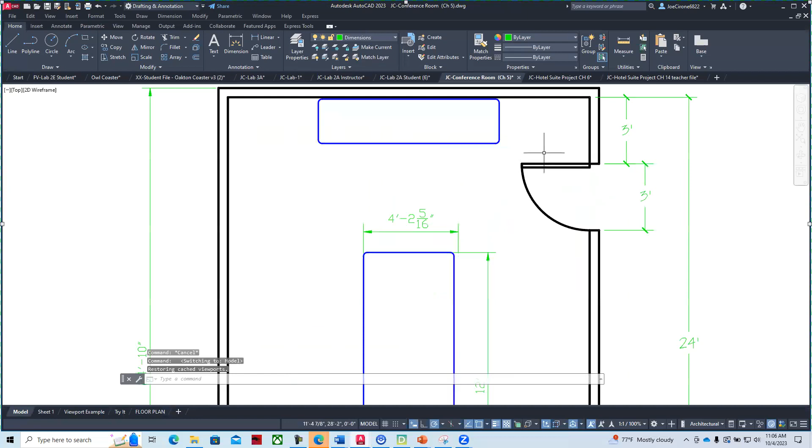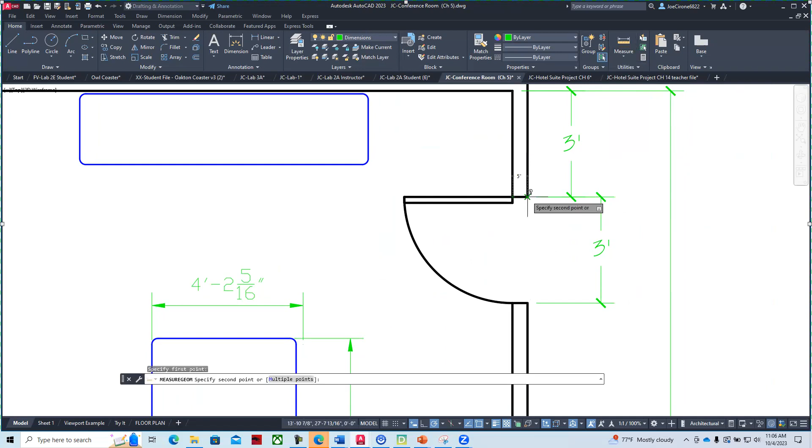So if we look at our CAD drawing, here's our conference room, and then we can analyze it. We can look at things like, is the door really 3 feet? We can go in and measure a distance using Object Snap or our endpoints, and we can see that it says 3 feet. We can measure things like how thick the wall is. Again, we can go and click, and we get that information.

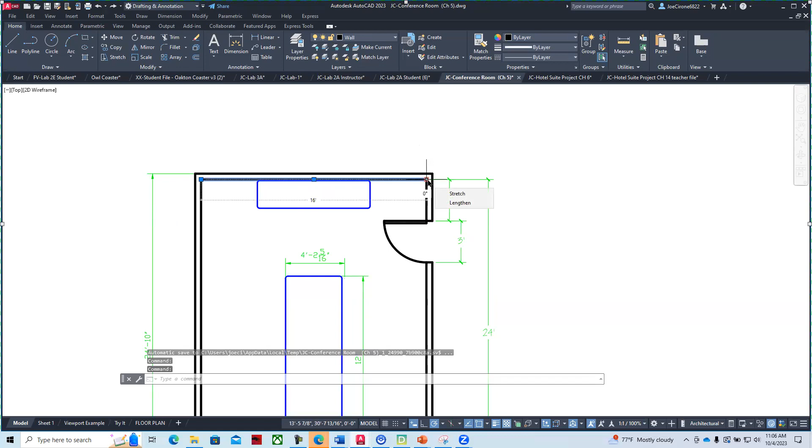You can also use grips. So if we click on a line and click on a grip, we can see that that is 16 feet, 0 inches. And then we can also calculate out room sizes.

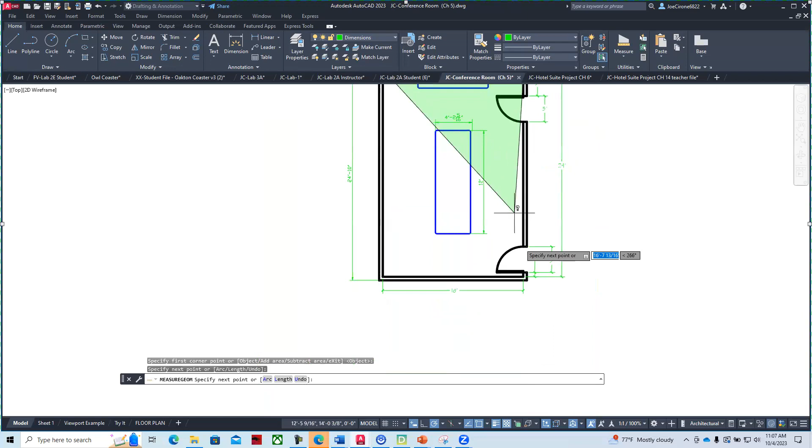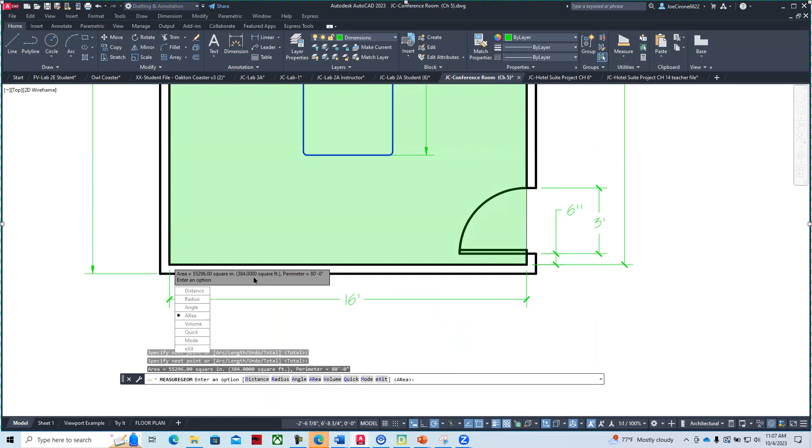So we can go to our utilities, and let's say we wanted to put hardwood floors in. We could go and measure the area. You want to use OSNAPs, but what's nice about using CAD is that it will figure things out even if the room isn't square. Square rooms we can usually calculate pretty easily, but if we work with shapes like rounded or other complicated areas, the CAD system will figure that out for us. This room has 384 square feet and a perimeter of 80 feet.

For example, let's say I had a round room, and I'll just make a big circle. Let's say this is going to be a 20-foot diameter room. Well, what is the area if I wanted to put hardwood floor in this? Let's just say I offset the wall 6 inches like the other one.

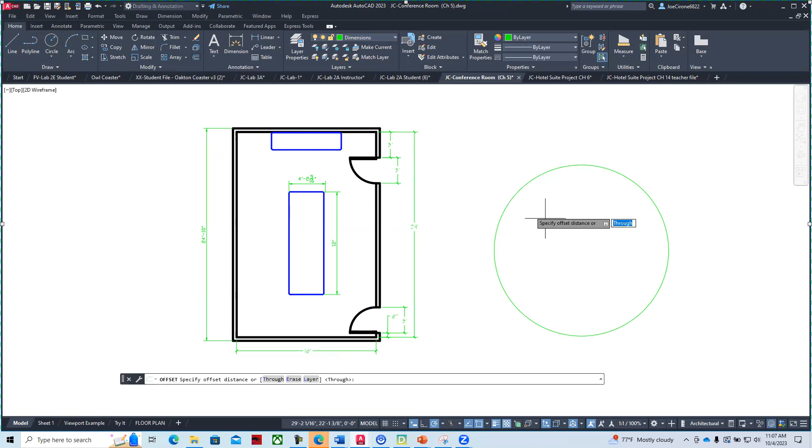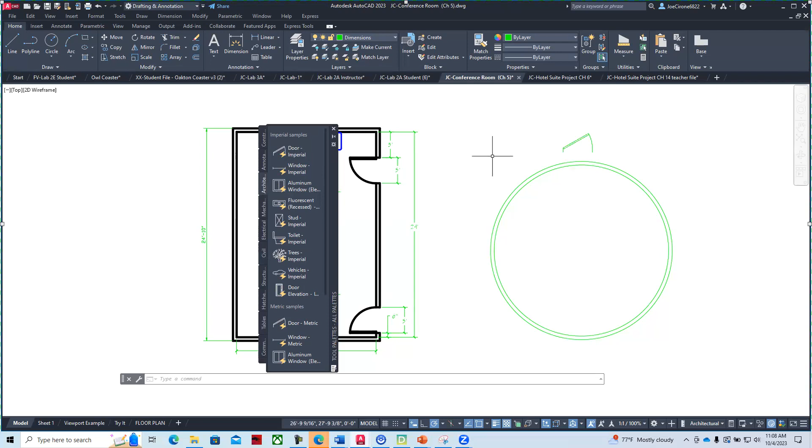And if I wanted to put in a door, I could go to tools, palettes, tool palettes, and use my tool palette for architecture to grab a door. We can also draw them. Let's say that this would be my room, and I think we'll leave the door out of it just for an example.

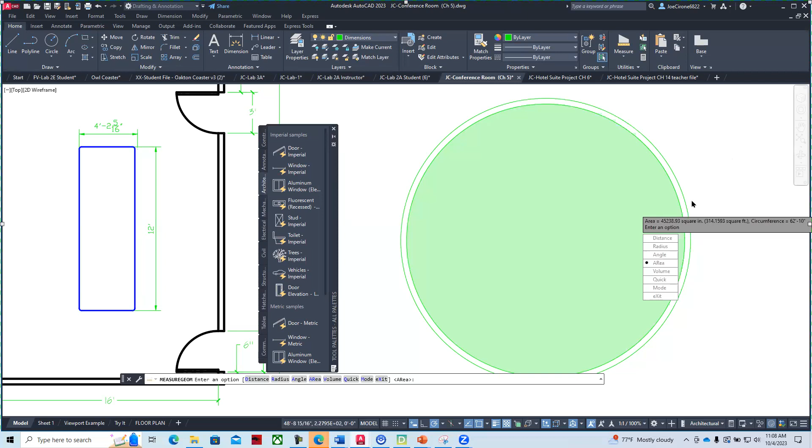But we can calculate out the area by saying area, then object, then select the object, and it will calculate that object out. We can see that this is a 314 square foot space with a circumference of 62 feet, 10 inches. And we figure it out in 5 minutes versus walking around the room with tape measures or trying to figure out the calculations. That's why we want to learn CAD.

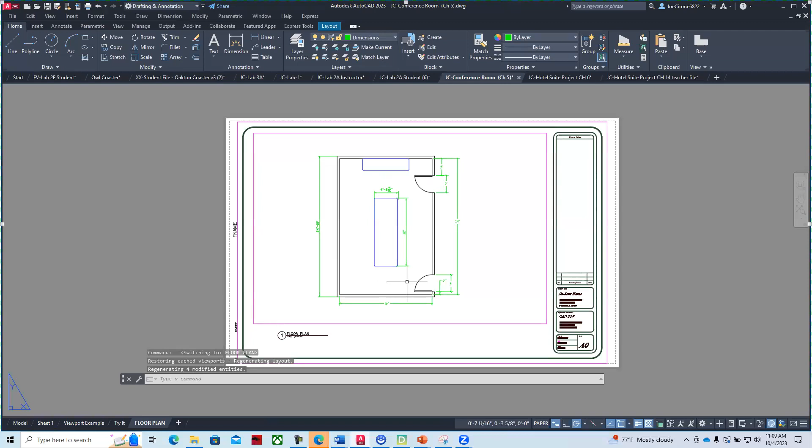Or at least that's our learning objectives and how they're applied using CAD. So module 5 was creating the conference room and then placing it on the title block in a viewport. As we put it on the viewport, we're making sure that we're scaling the viewports. This one is 1/4 of an inch equals a foot.

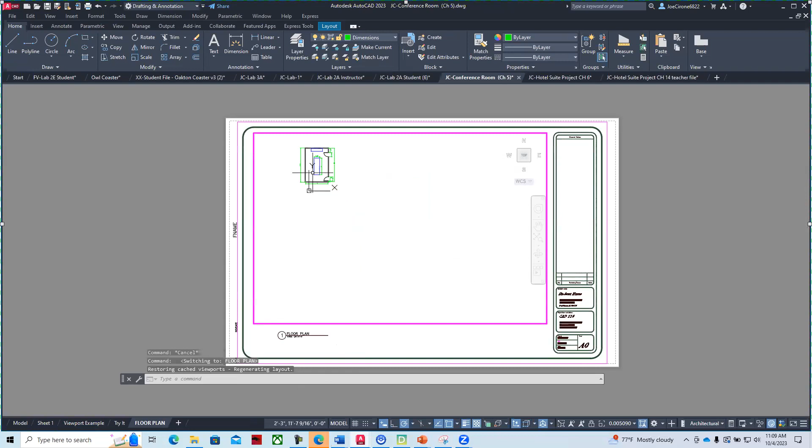As a quick review, if I unlock the viewport and just kind of mess it up, what the viewport does is it shows us what's in model space. So when we work with the floor plan viewport, we bring the drawing in. You can double click the mouse and it will put it at a scale that the computer generates, which is fine until we want to measure it. So it will be better if we set this up at a scale.

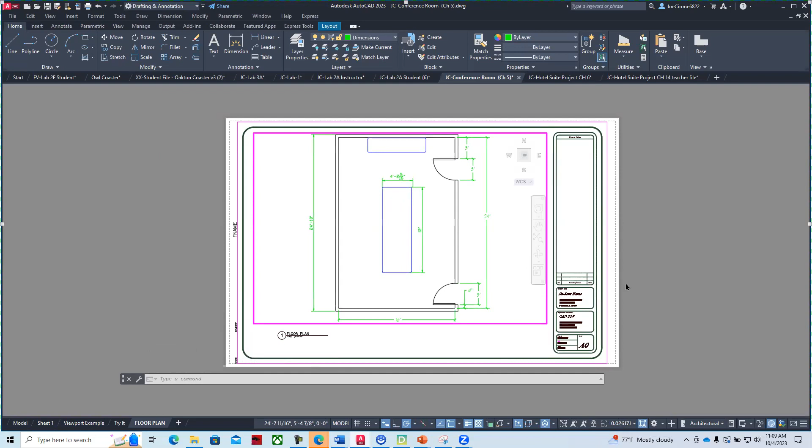So we come in and start with, let's say, 1/8 of an inch equals a foot. That's a workable dimension, but it's too small. We want to use the amount of usable paper. What's nice about using a computer is that it will calculate it, and we don't have to get another piece of paper and draw things.

In the past, you'd get an 11 by 17 sheet of paper, and then you would have to calculate out the scale for things and draw them with a pencil. It takes a lot of time.

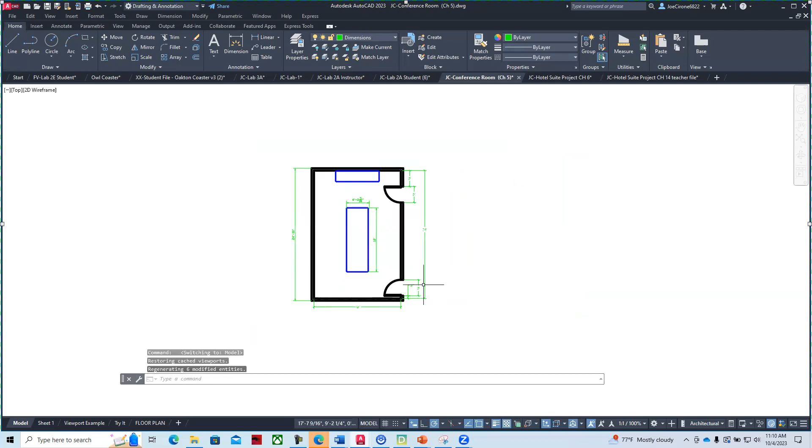But in AutoCAD, you make the drawing full size, real world size. So just like we talked about, if we measure this, it's a 12-foot table. And then when we put it on the floor plan, we just want it to be able to be measurable

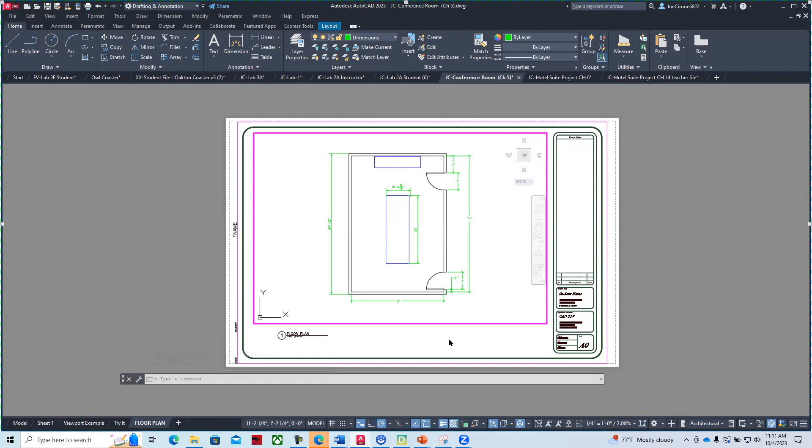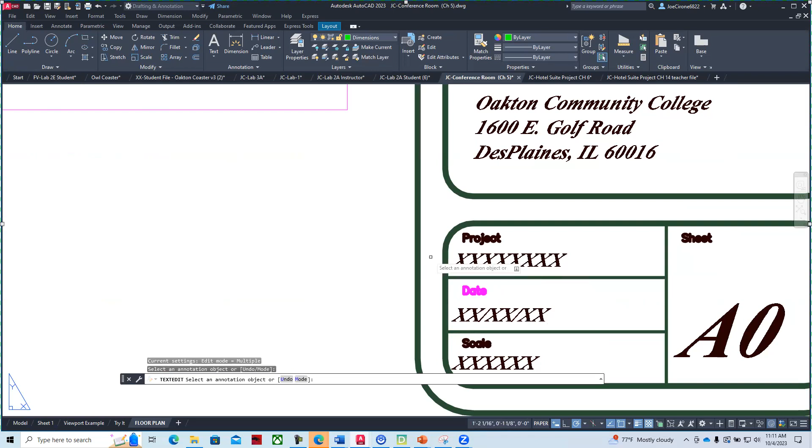And then we double click outside of the viewport and we update the title block. So you put your name on it, class, course, and then make sure that you put the date and the scale as we'll check it. And project would be the lab number. So that's module 5.

If we look at module 6, this is the floor plan for a hotel suite. We started this in module 4. We made the boundary walls. And what we're going to do is we're going to add more elements for the bathroom area. This project will be used throughout the course.

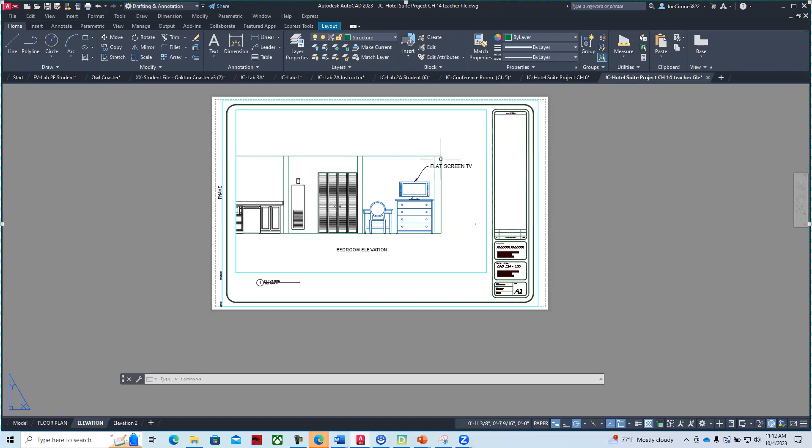And so as we work with our architectural title block, we can have multiple pages. This is showing what the room would look like from an elevation, meaning the heights. It's very common in architecture to have elevation drawings and floor plan drawings. So that's where we're going.

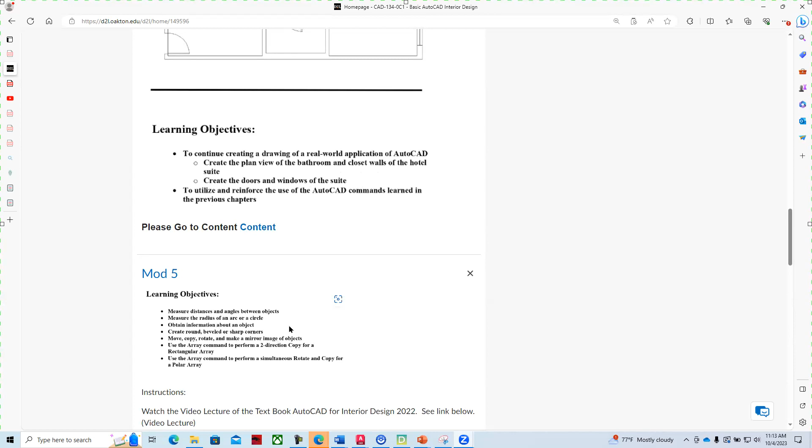In chapter 6, we'll look at the learning objectives from our textbook. When we look at module 6, our learning objectives are to continue creating a real world application of AutoCAD. We're going to create the plan view of the bathroom and the closet and the walls of the hotel suite. We'll also work with the doors, and then we'll use these commands to reinforce our previous commands like copy, rotate, mirror, etc.

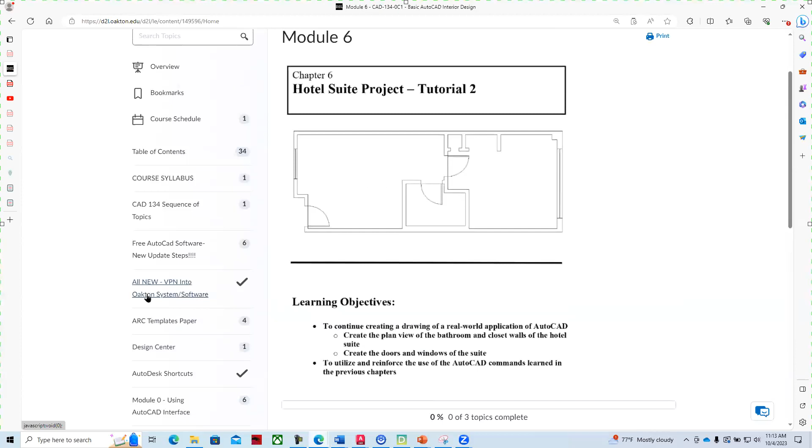We look at the content area for module 6. We have a link to the chapter review, and so we create these: chapter 6 hotel project tutorial number 2.

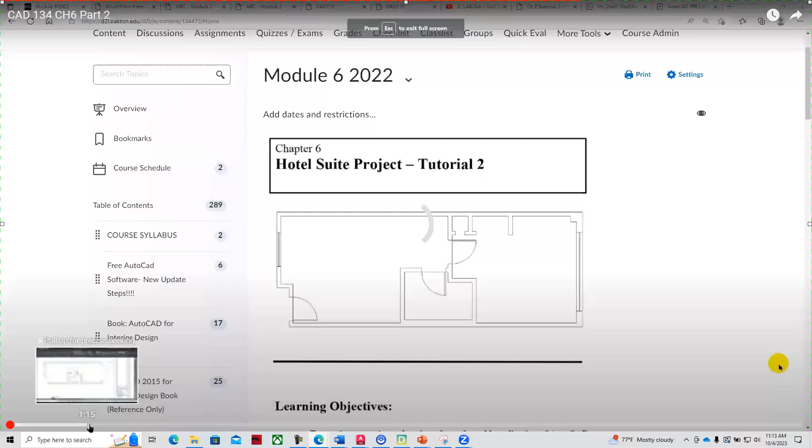We'll read through the textbook, show you how to create dimension styles, and you're welcome to rewind it, pause it, and we'll go through how to create the geometry. I'm mapping it to the textbook, so I'm going step by step.

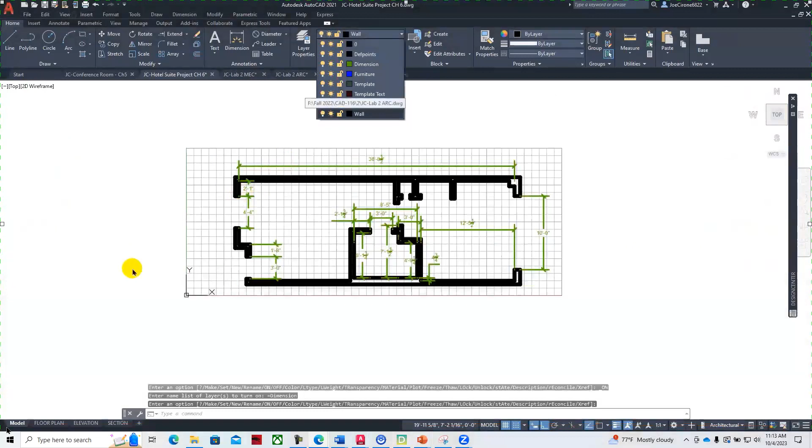And so we go through how to create that, module 6, and we tie it to the chapter. And then we also have additional videos for chapter 6 hotel.

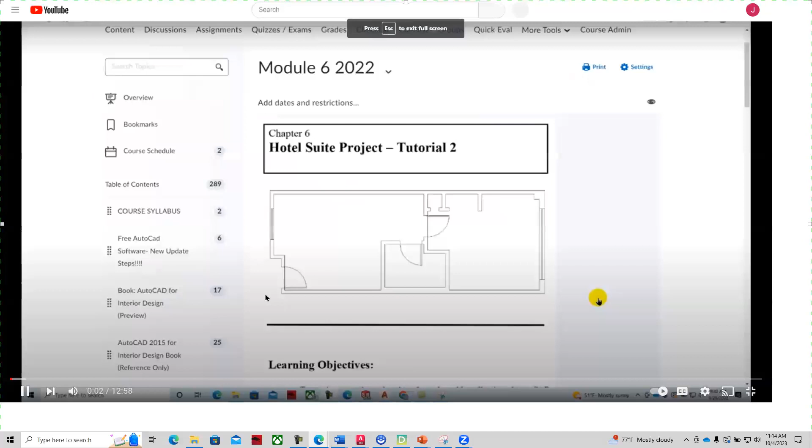I'm going to turn to instruction techniques—a lot of offset and trim, and it's detail work. So it's not easy. It takes time to get it completed and to work on that.

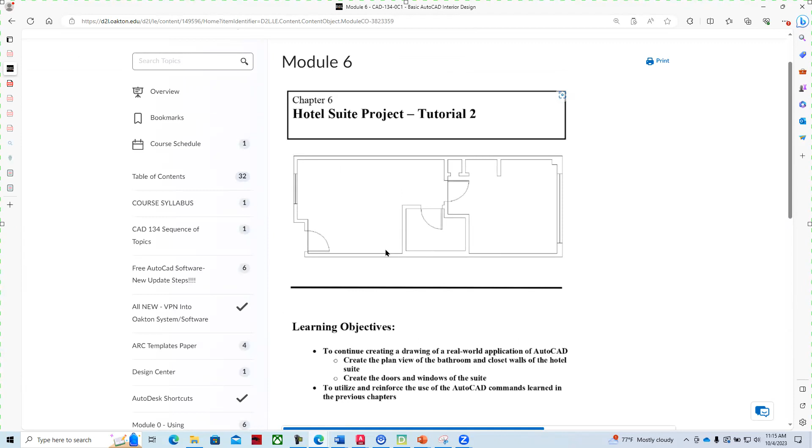So our assignment for this week is chapter 6. Our LOs are to create the hotel suite, and essentially we're detailing the walls and the doors. We're placing it on a B-size title block. Actually, we're just continuing from our last module 4 exercise where we started our hotel project. And then we had some bonus material—we can add some more bonus if you guys would like.